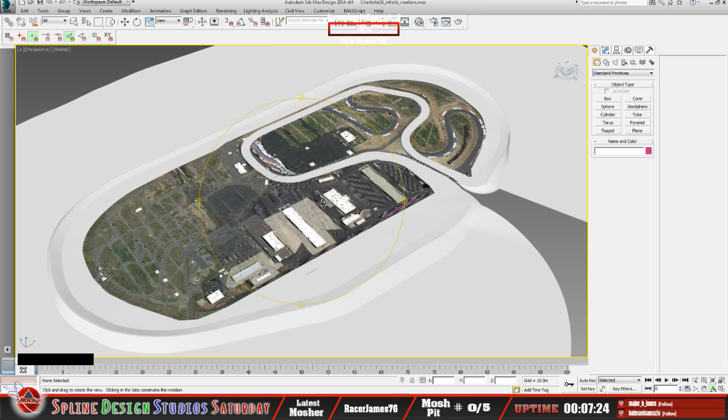So what we've got going on here is a current 3D orientation of the track model, I guess, in Sandbox for NR2003. And what we've done is make this infield object to fill in that voided infield object. I've already gone ahead, and I'll probably go over a lot of how I got to this point. I didn't save, unfortunately, a point here, I guess, as far as it kind of started off there and then just go.

There's a lot, I will say, as far as the way this is designed, there is a lot of Boolean cutting, as far as to get the shapes out that you need to have out, to get that shape. The general shape of this here can be done pretty much with a spline. All of it, the Boolean and all the Boolean cutter stuff can be done with a spline, pretty darn easy.

So I've also already got this model, as far as this infield object, it's already applied to the track, just to kind of see how it looks, and it's only mapped currently. Whether or not it'll stay that way is still yet to be determined. It's still mapped to the SAT image, as far as the detail, whatever detail does happen to exist in the SAT image. So here's where I added the infield.

Got the two separate PDFs as far as elevation adjustments, and now I do still have the background image in place, to which I could remove that. I'll just put this to none. Okay, so now that's all that's in. There's the infield object, and I can put this on object view, object placement view. So there's the infield object, and it lines up pretty darn good in comparison to what we have in Sandbox.

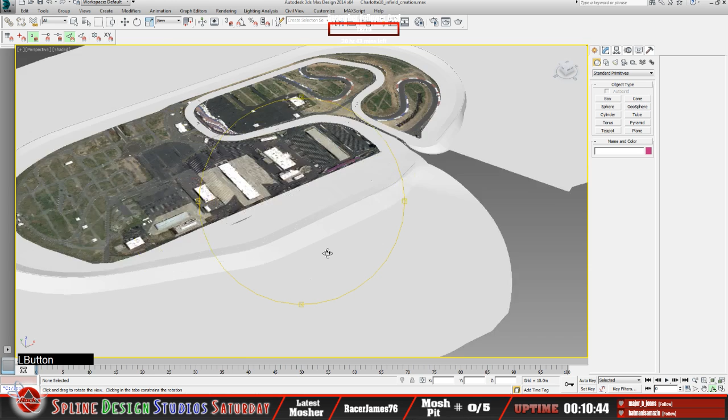So yeah, the biggest complication that has been up to this point is to get all of this to show. We didn't want to use the road course that's on the SAT image, as we needed this to show, and the fact that it's got elevation there now.

It's not 100% flat, like I said. That's what needed to be cut out so we could get that to bleed through, and you can see that clearly if I bring this here. Let's do this actually. Click out of that for a second so it shows up a little better.

Okay, so what we have, you can really see the elevations in here as far as this is the front stretch, just by the start finish line. This was going into what would be considered turn 1 for the road course. That's the other half there. We still need to make an object, I guess, to fill this void, but you can see the edge of the new infield object here.

I'll just kind of pan this over. You can see the track surfaces coming through very nicely. You can see the course very good, and you're able to... this is why I wanted to kind of do it this way. Let me see here. Yeah, I was like, what the heck's going on?

Okay, so yeah, I wanted to see how that would look on the SAT image. It's a little bit, it's not very good quality when I apply it this way, and that's what I want to at least determine.

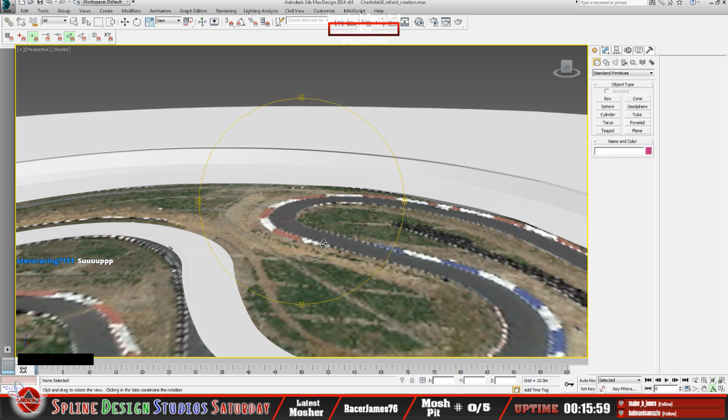Yeah, a little bit of a bug. I've been in and out of the restroom for the majority of the day, so I was kind of iffy as to whether or not I was going to be able to do this.

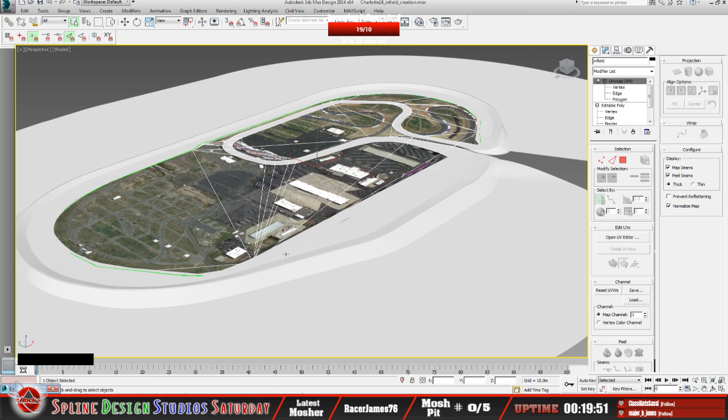Yeah, I've been in and out of the restroom a few times today, and I don't know where it came from. So I've taken myself some meds and kind of focused on something else besides just being under the weather, to be honest. I think it has to do with the weather - it's been up and down, like in the 40s, 50s, then down into freezing. It's ridiculous, it's murder on the body.

So yeah, but I definitely do appreciate that follow there, Classy. Very classy, sassy.

Okay, I'm still trying to... I'm debating here because all this is done. And I guess one of the things I wanted to do, that's the other thing I wanted to do - let's hide this for a second.

This is our infield object with the mapping, showing the wire for that. You can see it a little closer, as far as how that's all cut out to see all that definition as far as the surface that's actually raced on. And the main idea behind this - yeah, definitely, it's like I said, I had done it.

It was brutal, as far as when I woke up this morning with a headache, to the point where I don't want to go into the details of it, but you kind of get the idea. It's just that flu bug that's been going around.

I think, actually, going back to TwitchCon, because I know you had gone to TwitchCon, as far as the bug, what did they call that? You can probably refresh my memory on that. There's quite a few people that went to TwitchCon that got it.

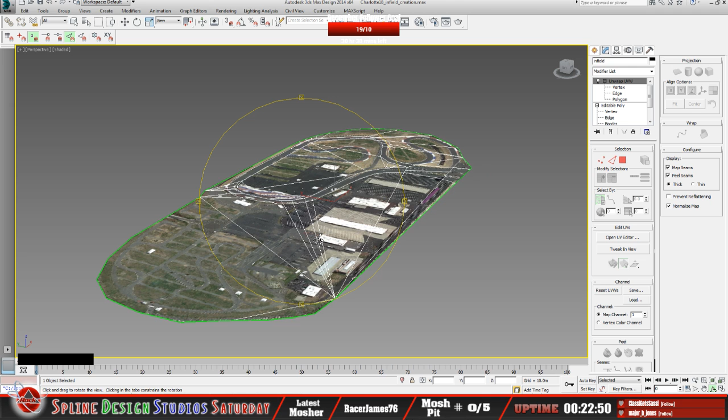I'm glad people enjoy doing those audio commands. I like to give the viewers something to interact with, I guess, especially when I'm doing spoopy stuff, as far as that tends to get me a little bit salty, just to kind of set myself straight again.

Without going into too much more detail, you kind of get the idea as far as what's going on with this. I think what I'm going to do, and I was going to try and fix the ends of it, but because I got the map modifier in there, I want to keep that in, to get to this point in a new construction of an infield, just to give you an idea of how I got to this point.

Like I said, it does involve quite a bit of Boolean cutting, and we've showcased that plenty of times before.

So I'll bring the track back, and I'm going to hide this section here. There we go. So now all we've got left is the track spline geometry, which is basically what you see here. This is a direct representation of that.

So what I can do at this point is go over this, and it might be really quick, so if there's anything that gets missed, like 'whoa, hang up a minute, how'd you do that,' feel free to let me know. I'm here to give some insight as far as what the process for doing these types of things is, so just chime in if I'm going too fast.

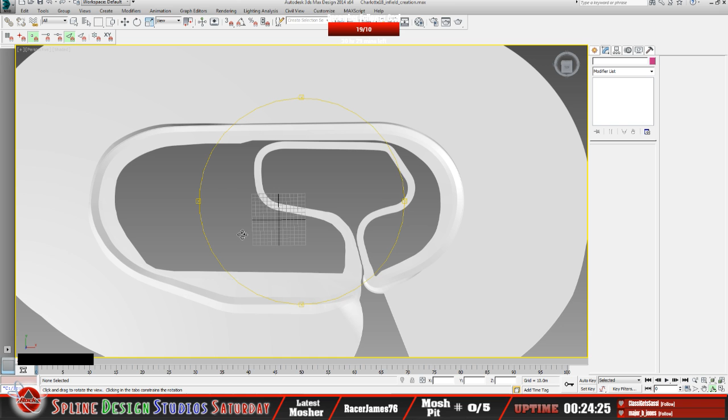But primarily what I'm going to do at this point is fill this void out, and the way I'm going to do that is go up in here... no, I'm going to go to the star.

And then I'm going to make sure I'm in compound objects. Actually, no, sorry about that, it's the second tab here for those that have it. I'm using 3ds Max 2014.

I have not been able to get the latest version of it yet. Eventually I'm hoping to do that. There's not a whole lot of difference in the versions of 3ds Max as far as how these workflows work.

So as long as you get into splines from the second tab here, and this second one for shapes, you want the option for line — this will allow you to create your spline. So you select this line, and you can start pretty much anywhere you want based on what you have here.

I could start up over here. I tend to like to start doing these types of things — this is where my front stretch is, where the start-finish line, the lead segment, if you will, is. So that's kind of why I tend to start over here. I mean, it's not pertinent that you start in a particular position, because you can adjust it anyway once it's all laid out.

What I don't want to include — I only want to focus mainly on this void here. I'm not going to do this; it's going to be an entirely separate object over here to fill this void eventually.

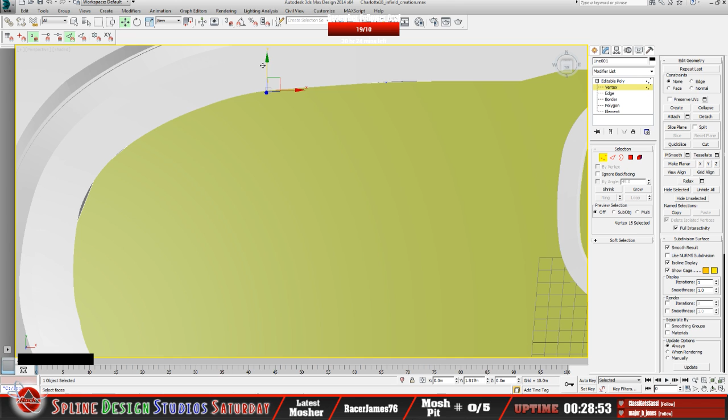So yeah, what I can do at this point is adjust all these, see these little gaps that I have in here. Whether or not I'll need to, and like I said, I've done this very quickly, just as long as this is tucked in here, I can select all these different points now and just kind of tuck this in here. Now, being the fact that this is still a top-down view, I'm not taking care of the gap that necessarily exists.

This way, so you can see the gap this way too. But try to put yourself in a discipline to do one thing at a time. Don't try to do both at the same time, because it'll get messed up. Trust me, I can tell you from experience.

So I'm just going around this just to make sure, from the top-down view at least anyway, that it's covered and it's slightly tucked under our track spline geometry model. I don't see any, like maybe over here. Yeah, so I'm just going to fine-tune these. Doesn't look like I need to add anything more, which is good.

Alright, just to kind of get that tucked in there a little bit. There we go.

Okay, now from this point what I can do is really zoom in on this. If I use the Z key with that vertex selected there, I can zoom out on this. You can zoom back out just a tad. Now what I can do on the Z here, I can either go down here and just move it up. I tend to just like to pick it up like this, and you can see it.

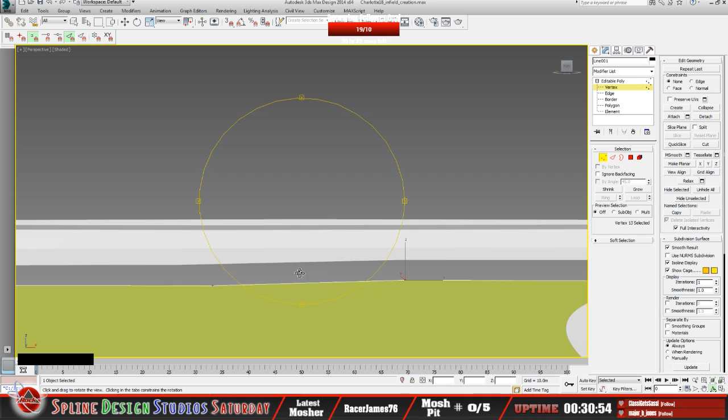Alright, so let's go ahead and do it this way. There we go.

Alright, now if I pan this around... yeah, that's a little better. Change the perspective there a little bit. See, now you can see it, how it's bleeding through as I pull this up on the Z, and you can see it changing down here too. You can see how far I've got it tucked under there and how it bleeds into the tracks, this model mesh. So that's more or less what I want to do.

Now you can necessarily take the approach of doing a snap, turn your vert and edge snaps on. What I've come to find in this method, because there's so many points in this model, it doesn't want to snap where you want it to go very well. So I've just found it more useful to just go ahead and grab those particular points like I just did and observe how it bleeds through the model mesh, and just do it that way.

You can attempt to do a snap by just turning your snaps on, and either using both the vert and edge snap, or just either or. I'll just demonstrate this really quick here. So it's like if I have the vertex and edge snaps on, you can kind of see it works out, I guess it does work out pretty good. You won't always get this effect though. Sometimes it'll get wonky on you.

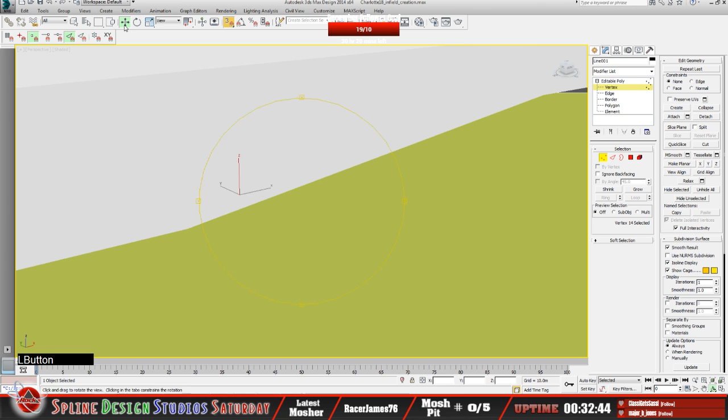But in this case, it does seem to be, yeah, see, it's not 100% snapped. See, if I turn this to the side here, it's still not 100% snapped. So the fact that I don't see it bleed through the actual mesh like that, see, this is a perfect example. It doesn't put it exactly where you want it.

A lot of times I can turn off, let's say, vert snap, the vertices, and just leave the edges on. See, you can see how it gets really wonky. You don't want it showing through the mesh. You want it just to kiss it, if you will. So, again, that's kind of why I've found it necessary to just do it this way until it bleeds through and just kind of tuck it down.

Like so. And then if I pan it over there, now you can see that's filled in. See them where it's not yet. Okay, so you just have to do that all the way around. Do that all the way around here. Okay, just gotta find a point here. There we go. Okay, so then just zoom in on that with the Z and zoom back out just a tad.

There's a lot of panning around with it, that's for sure. That's doing it again, okay, hold on, I gotta change my perspective. Let's bring that back down. See, when you don't see it coming through there, like I just did, that means your orientation as far as your little transform gizmo, you're not truly grabbing the Z-axis. You're grabbing more than that. So that's when you don't see it bleed through there, that's when you need to readjust.

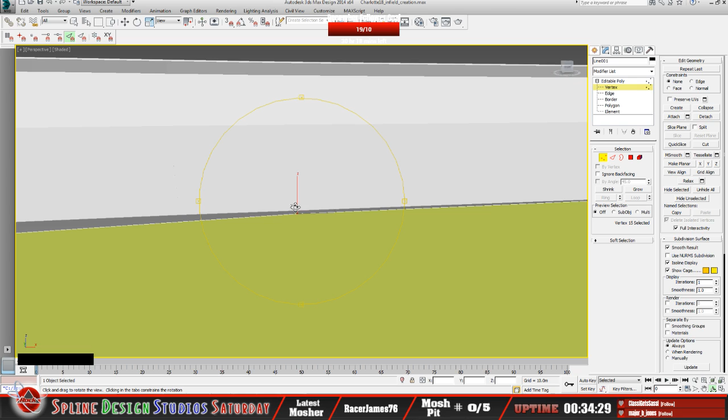So I can just move this like so until I got the better view. And because there's so much elevation change in this thing, yeah, see now you can see it bleeding through. Just kind of tuck it under just a little bit, and there we go. Okay, so we should have another point. Looking for the blue points. There we go, here's the next one. So once you get into a flow here, it makes it a little bit easier.

I know, trying to explain it all, it's just like, it's a lot to try and get under there. See, so there might be some cuts that I might have to make to kind of fill in these points where it's not getting 100% up to that. There's a little bit of a gap there, not too terrible.

And at any time, as far as doing this process, you can always render it. Going up to the renders, I'll do a render setup, and let's put it at 800 by 600, and just render it, just to kind of get an idea of how it's turning out that way. So far it looks pretty good. It's not artifacting or anything like that. We're good so far.

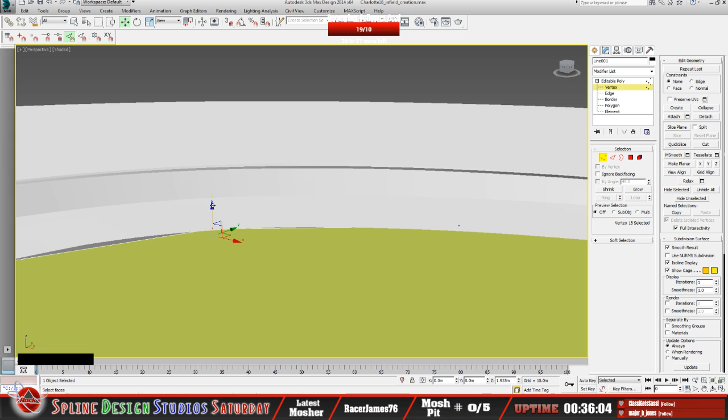I might have to put a cut in here eventually because it's not tucked under a bit. Again, get into the discipline of only doing one thing at a time. Don't try to adjust it in so many different directions at once. Just try to do one thing at a time. I've come to find that type of workflow gives you better results.

I'm definitely going to have to put a cut in here, for sure, because that's not 100%. Now, I could bring this all the way in like that if I really wanted to, but I don't really like how far that's going in. That's just personal preference. I'm going to keep it about the same distance from the edge as far as tucked under. This is not wrong, don't get me wrong, but I don't know if I like that. We'll go ahead and do that just for the sake of this, though. I laid this out pretty quickly, so yeah, see that's bleeding through, so that's good.

Okay, so I should have a point here. All I'm doing is drag selecting, because I know I've got points roughly in those areas. Since they're underneath this track mesh model, you can't see them until you just drag select it. This one needs to go down just a tad more. And you can always reassure yourself by rendering it to make sure it's not bleeding through.

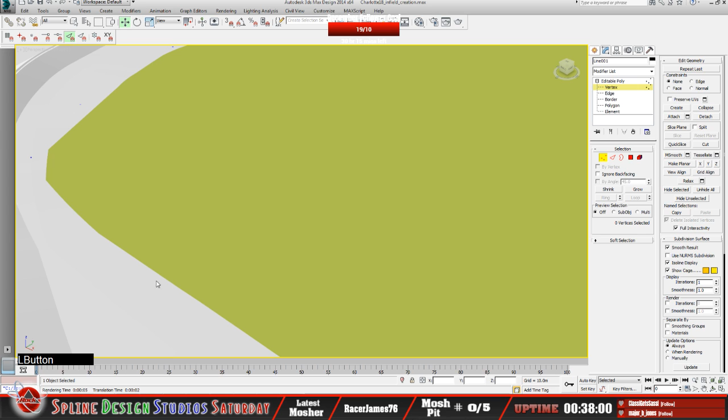Yep, that looks pretty good so far. Okay, so we should have a point here. We got one there, there's the other one. So bring this up, yep, that looks pretty good there. Alright, should have a point in here somewhere. There we go. Bring that up.

Yep, so you see how it just bleeds through. Tuck it down just a tad. Alright, now there should be... oh, this is the one I went all the way across. Down here, I don't have anything in between here. This is pretty straight in this part, and this would be what would be considered pit road, as far as our virtual world.

Okay, so... whoa, damn mouse. I keep adjusting the DPI on this thing. It's a very good mouse if you use it correctly.

Okay, so see what it's doing so far, and you can see that change in elevation over here as I move just this vertice. It's wanting to pull a lot of this up already. That's primarily why you need to cut this all out, so that you can adjust this area independently from the rest of it. Because otherwise, you're going to have a lot of this track surface that gets raced on, and it's going to be below that infield object.

Okay, so what we're going to do is just make sure it's lightly tucked under there, like so, like that. And I don't have anything in here in this area yet. The only places I have any points is on the extreme edge of this. Eventually, once I Boolean cut it, it's going to have points in here where I can adjust them more precisely there. We're going to get to that.

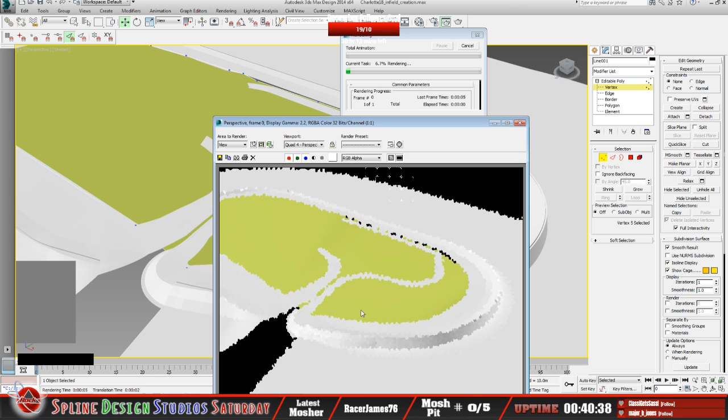Alright, so there's one here. Again, I'm going to go ahead and render this just to ensure it's not bleeding through in the fashion that I don't want. Okay, let me zoom in on that just a little bit more. And I'll render it again.

And doing this rendering thing is going to give you a more precise idea of what it's going to look like. If you see any artifacting of this edge that I'm trying to put here, as far as this pukey looking green coming through the white or the gray in the render scene, then you know you need to adjust it in the perspective view, in the viewport.

Okay, so moving along, that's good there. Yep, see all this, we'll be able to adjust that manually. I'm going to have to bring this in a little bit, because I could still have a gap this way. Okay, yep, still a little more. I might have to cut that a little bit more when I do my Boolean cut.

I should be able to apply an additional vertex in there. Alright, so bring this up.

Okay, this is a pretty simple model, I'm sure you can probably imagine. The only complexity in it is just the fact that you have to have all these cuts to be able to adjust them at particular points. But for the most part, this is a very, very simple model.

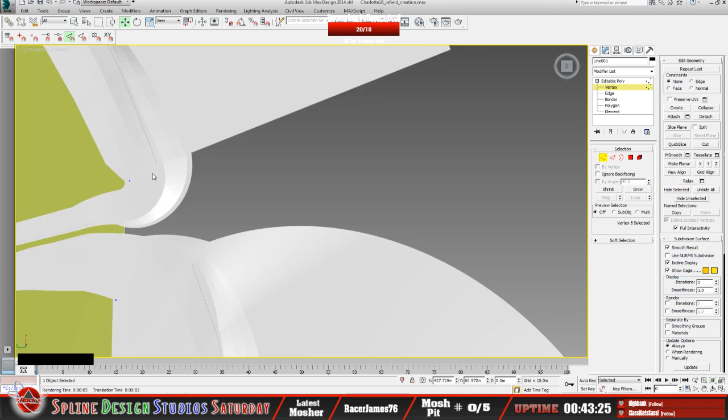Hurt my brain with that, well, don't allow me to hurt it too much, okay? And I've always mentioned this, my philosophy has always been, not to be too harsh, but the only dumb questions are the ones not asked.

If there's something you don't quite get as far as what I'm trying to apply here and what I'm trying to show, feel free to ask. I am in no means one to point people out to be like, really, you didn't know that? This is why I do these streams, because there's a lot of people who have somewhat of an idea what goes into these types of things, but they don't know everything. I've got a little bit of experience with that, and that's why I like to do these streams. So that people get a better appreciation for the amount of time that goes into creating such things as this.

So, but if you do get proactive with trying to create something on your own based on the information I can provide, then more power to you.

Alright, so now we got that all adjusted. To this point, this is where it gets a little tricky.

What we need to do now at this point so that we can cut out this area here that is raced on, all this area in here, and it's hard to see because it's covered, a lot of it. We need to be able to cut it out in our poly here that we have. Let me see how many polys this actually is. I can select polys here, select all those, and right now we have, that's only one poly.

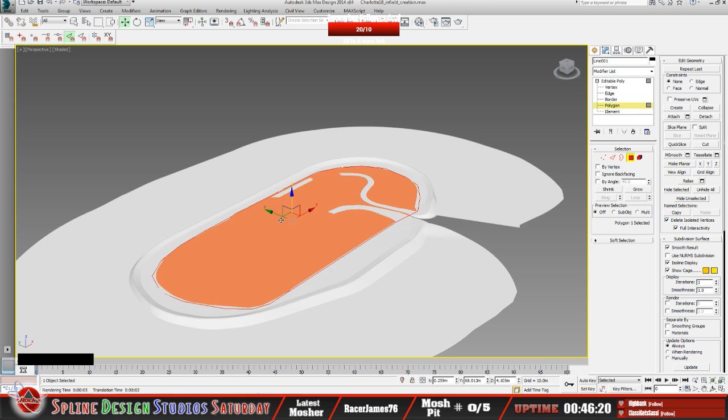All these points in here, it's kind of hard to see in the stream, but you can just tell how much detail is in here. If we could use this as an actual model, just the way it is, that'd be glorious.

But the fact that that's impossible - there is no, even with the newer simulations out there, as far as different game types, as far as the graphics engines, it can't do it. It's impossible. So again, part of the reason why I tend to stream these types of things is to kind of understand what goes into the thought process of building these types of things.

So yeah, now where we're at - I'm trying not to get sidetracked here a little bit. We need to cut out that area, and the way we do that is I'm going to hide this one poly we have for the object so far, like so, and go to a complete top-down view. Let me turn this so we're sure we're top-down, complete, there we go.

Now what we can do is create a new spline as a cutter to cut into that one poly object we just completed, to get this area cut out.

The way I went about it initially, I'm probably going to try something here - I want to see if I can get away with doing one big piece for the outside and inside at the same time. I'm going to see if that'll work. It may or may not, because when you lay your spline out to do a cross section, you have to do those independently. Let me take this really, really slow.

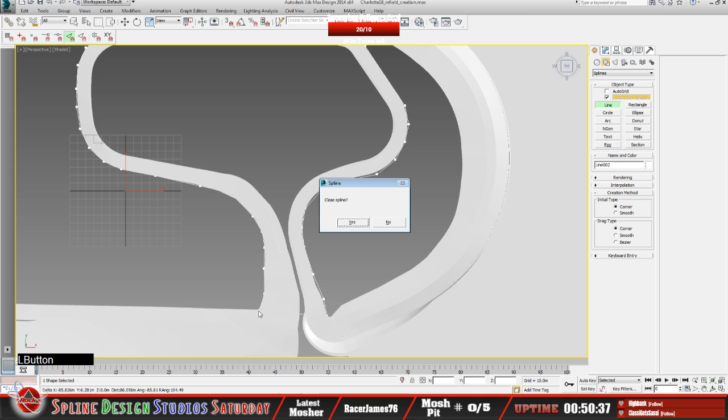Alright, and then what I'm going to do - I'm trying to remember how I did that now. I think I'm going to cross this way. Yeah, pretty sure that's how I did it.

Now I gotta remember, because this is why I was talking about being able to do them both at the same time, just running it through here. You could probably do that, actually, now that I think of it - you should be able to take this through here and then close it up that way. Let me try it that way, actually.

I'm going to go ahead and delete this one. Okay, I still got line selected there, so I'm going to go this way and lay this back out. Alright, I'm just going to follow through with this again.

It can tend to get really tedious, you do have to have a steady hand for sure. I kind of lied a little bit too, as far as not being able to move around in there - if you have a mouse with a middle button, it does let you. The key to having it all in one view is so you don't have to do that, because you can screw it up pretty easily mousing it out with your middle mouse button. And if you're this far into it and have to start over, that can get frustrating. So once I get down here, I'm going to cut across here.

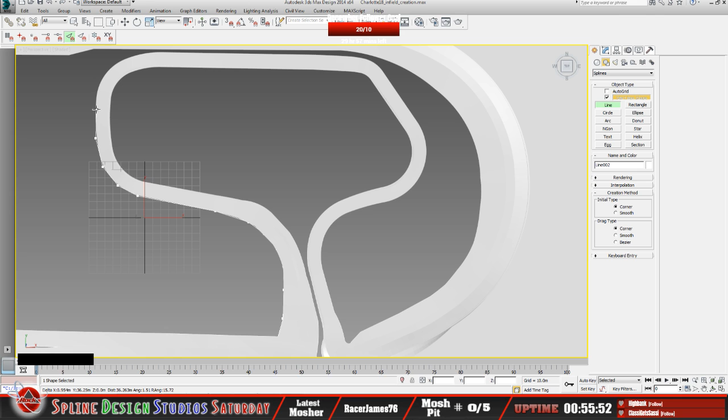There's other ways to do this as well, as far as using planes. Like, say for example, if you want to create a plane, to be honest, to get more precise on these corners and such, you almost want to use a spline like I'm doing, because trying to conform a plane is a bit tougher. It's going to be much tougher. So, alright.

Yeah, I can adjust a lot of that there. So what I'm going to do, I think, I might not even have to do a cross section actually. No, I shouldn't even have to. I can do it just like this.

Alright, now from here I need to do spline, and I want to clone this. Yeah, so there should be a point right here is where I started. Okay, should be.

Alright, now I want to clone this, do it as a copy. And I've gone over this before too, the difference between an instance and a copy. If you do it as an instance, your clone options - any changes you make in one line, in this case, happens to the other one as well. If you do it as a copy, they're independent of each other, as far as any adjustments you make in one, and it does not affect the other. So, and we've mentioned that before, but that's a nice little refresher footnote there.

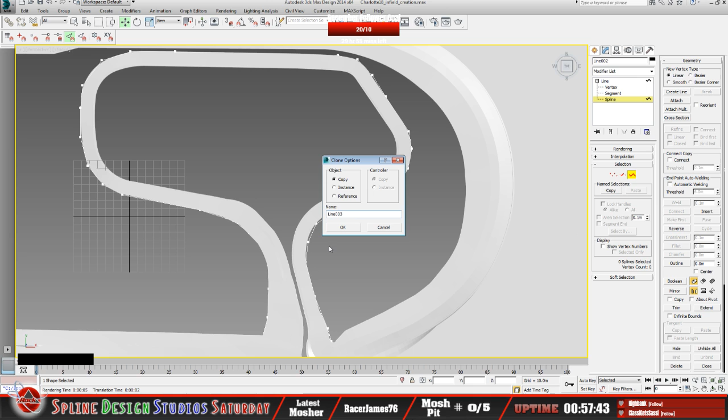Okay, so we want to clone that as line 3 in this case. The naming conventions of that aren't critical. Now what I can do with that cloned line, it's going to be right on top of the other one, so I can take that and just move it up. So now you can see that's floating, and it doesn't matter how high it is.

I want it to be extended past the actual model here. Let me see here. What I might have to do initially, just so I can fine-tune and tweak, because I want to make sure... and I can probably do that after, to be honest. I guess once I get it cross-sectioned, I'll just do it that way. So now that I got these two lines, I don't want to confuse anybody. That's my whole problem, because there's plenty of different ways I could go about this from this point, but I'll keep it as simple as possible, just so viewers understand.

Okay, so with that line here, that's a direct copy that I have for the two lines, so it has the same number of vertices in them. That's a critical point. Now what I need to do is go into spline on either one of these, doesn't matter if it's this one or the other one, and choose spline, and then I need to do an attach. And what this should do, if I did it right...

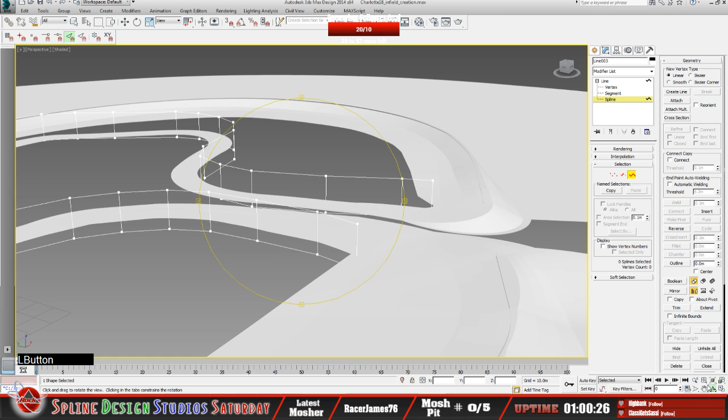Okay, so let me close the track mesh. I want to see how this looks over on this end. From this vantage point, it looks pretty good, but yeah, I want to double check this. So yeah, that's actually favorable.

Alright, so the two things, if it wasn't clear: you first want to attach so that both lines are highlighted and they're loosely welded together, tacked together if you will, and then do the cross section. This gives you this orientation here, so that's basically 2 steps to get it to this point.

From here, what I can do, now that I got that done, I can just right click on this and convert it to an editable poly. And what the heck happened there? Oh, that's not cool. What happened there? Oh, I know what I missed. I got ahead of myself.

You have to put the surface modifier. Okay, so while it's still in this one here, you want to put a surface modifier. See, I was kind of getting ahead of myself there. So in the rollout here, with this selected like that, you just put a surface modifier into it. So just scroll down here, you can type it in... there we go. So that puts a surface modifier on it.

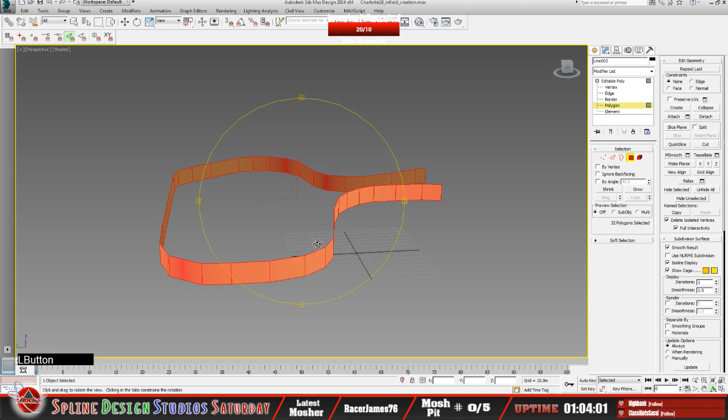Now what I can do is bring back our infield object. Actually, no, I want to bring back the track mesh. That's what I want. Then I can fine-tune the areas on this cutter that will be used to define that area better. From this point, I can clone this cutter to make the internal one. I can adjust those.

In fact, I'm going to go ahead and do that. We'll do an edit clone of this object as a copy. Then from here, I'll just slide it out of the way like this. Then I can adjust those independently on the inside.

So if I go into vertex here, I can grab any of these points and just kind of move those in and get it to line up to the interior. We'll just kind of loosely put these into place like so. Let me go down, let me see if I can do it this way. Top down view. What the heck is going on there? Kind of wonked it out there.

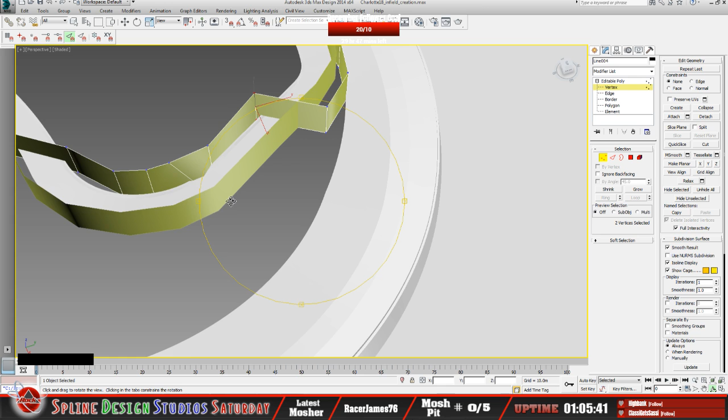Yep, I kind of wonked it out there just a little bit. I don't know how that happened, but okay. See, it was straight up and down. Let me adjust that, pull it out this way. That's a little better. Yep, must have been the way I grabbed it. It's not wrong, it's what happens. Just realizing what you did when you know what's happening to it.

Alright, so bring these in. Let's bring this in. Yep, so I'm just kind of loosely putting these in place here, kind of outlining the interior part of this. Yep, so I'm kind of grabbing both those vertices on the top and bottom, pulling them simultaneously.

And like I said, all this is going to serve as a cutter for our infield. See, we're going to have to add some in there because this is too straight. We'll probably move this. There we go. Kind of get the contour of that corner there a little better.

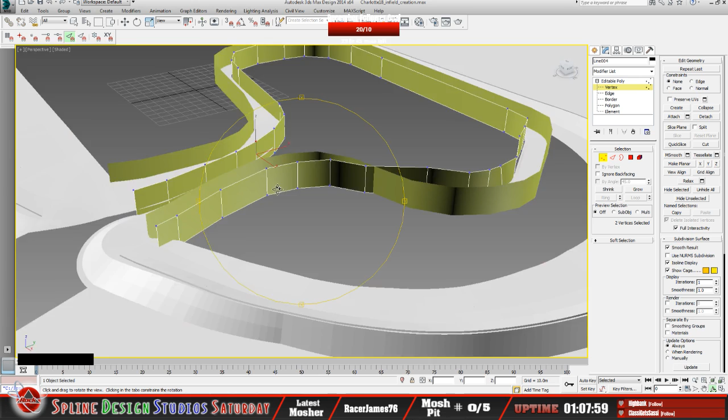Okay, so now we got that. Now we need to put... whoops, guess I missed this. Just gonna get this all loosely into place here. Alright, so now... is that... yeah, okay. So I gotta move all this here. Okay, let's go back to top down. Nope, just gonna move this all in place.

So you can kind of get the idea as far as what I'm talking about, as far as how much you'd have to do to get this infield object cut, so you can get all this detail defined into it.

See, I did it again there, that part. Only selecting the one, yep. This, seriously? Holy crap. There we go, I'm gonna get those both here. Come on. No. I'm being a poopy. Okay, there we go. I could have just zoomed in on it, to be honest. Okay, there we go.

Okay, so I'm just getting these loosely lined up here for now. Probably have to adjust them again before I cut, but just to kind of get them somewhat into place. Okay, let's get 100% top down.

Hate when that happens. How we doing there, Torch? Glad to have you in the stream. Hope your day's work is pretty good for you there. Ooh baby, it's good to hear.

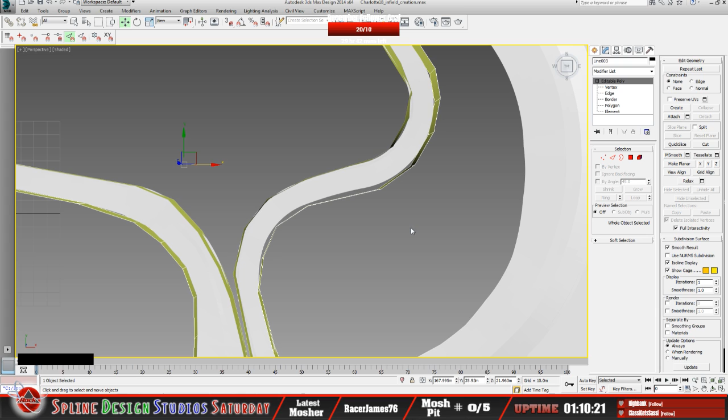Okay, yeah, so what we'll do now is go into vertex and this one, kind of adjust this out.

Kind of good to see we got plenty of members from the NR2003 community, I guess, coming in on the streams there. It's good to see, I like to see that.

Okay, so the fact that I'm on a completely top-down view here is giving me a much better... and I'm probably not going to use this as... should be a point right there. Oh, I'm not on that one. That's right, that's right, okay.

I'm just trying to give you an idea of what the process, I guess, for doing this is. This may not be 100% favorable for what I would use, because I've already got the infield object made. So I just want to go through, I guess, somewhat the process that I went through to get to that point.

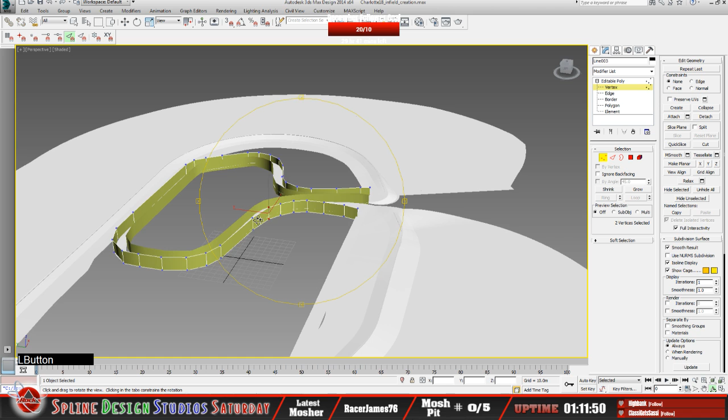Alright, so now we have our two cutters, which will more or less serve as one cutter, really, once it's all said and done here. It's not 100% clean. What you could do from here, if you needed to, let me see.

Say like in this line here, it's not... well, there are some vertices. Okay, let's check this out here for a second. Yeah, I should be able to move these to kind of more precisely define this corner, as well as in here.

Alright, so if I go vertex, vertex, yep, just going to fine tune this a little more. I've got this pretty jagged, to be honest, but you don't want that as far as when you're cutting it, that's for sure. You want it to be as precise as possible.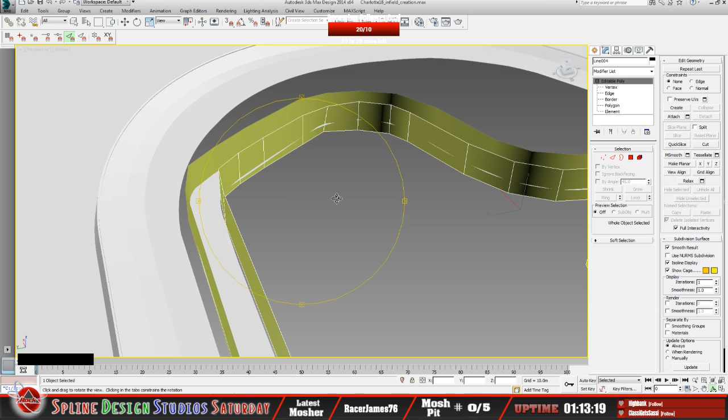Not sure what's going on with that there. I don't know if it's not 100% top down, maybe. Alright, just for the sake of this demonstration, anyway, let's say this is satisfactory. This will work, as far as using it as a cutter.

From this point, what I'd want to do, I'm just going to go into a side-on view like this. Go to vertex, and I want to grab only the bottom vertices. Actually, I don't even need to do that. Yeah, I don't even need to do that, I can just lower that.

Yeah, let me just lower it. And by doing so, that's going to put it below where the infield plane is, what it's going to cut into. You want to have a little bit of excess, so that it makes the cut completely through.

Alright, so just by lowering that, what I can do is I can actually look at the Z for that. I've got it at here, and I can just copy that to the other one so that's at the same level. Okay, go into this one, paste that in there. Now those are both at the same level.

Now check this out. You can see, even by doing that, just how much elevation change there is, because these two booger-green looking... whoops, what the heck? Oh, got stuck in this.

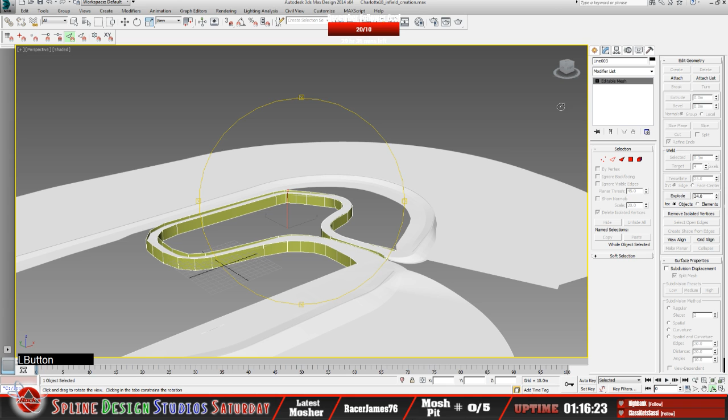So I'm going to my hammer, going over here, and going to collapse like so, and just collapse selected. So now that's one object. You want that to be one object. As far as the cutter, we don't want them independent, it won't give you the best result as far as doing that. So we want it as one object. Now what I'm going to do is bring the infield object back.

That's what I was like, what the heck? Yeah, this is the one I already got done. It's like I almost forgot there.

Okay, so this is the new one that I made here. Now I'll hide this track mesh, so now all we have is just these two items: the item we want to cut and our cutter that we're going to use to cut it with.

You can see why you drop that down - you want that to protrude through so that it makes a cut through this model here, as far as the one poly for the infield object. We want that to be able to cut through that, so that's why you do it in this fashion.

Okay, so now from this point we want to go to Pro Boolean, or actually just Boolean is fine. Go into the starburst here, same place you'd go to lay your spline, and then from here go to Compound Objects, which is in this first tab. It may or may not be selected initially, so go to Compound Objects and you'll have a Boolean option.

You want to have selected the piece that you want to cut prior to doing this. So with the item you want to cut selected, you do Boolean, go down into here, and do cut refine like such. Once that's all selected, you go pick operand B, and operand B is your actual cutter. So if I go like this, hopefully that works.

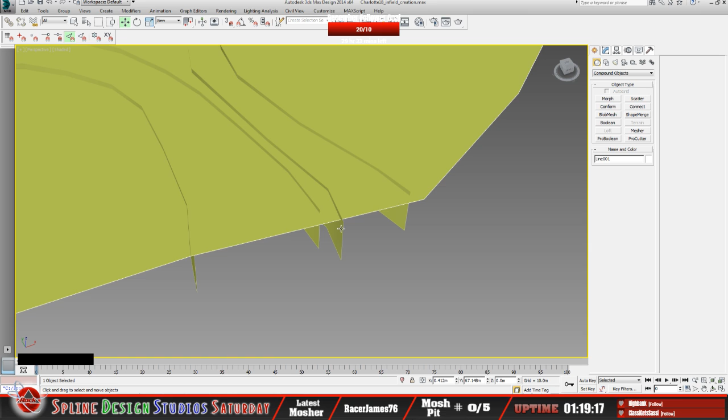So all I need to do is - and that's pretty simple actually - I can select this part here, and that's all one object. It shouldn't need to be an editable poly, but I'll go ahead and do that anyway. So let's do that, editable poly, and then go to polygon. Actually, I can go to edge.

Okay, and then just do a shift, left shift drag. That'll create a new poly. And all I'm trying to do is just connect this here so that it doesn't have a gap there.

Alright, so with that done, now I'll just snap. Let's put my vertex snaps on here, put that on up here, I'll turn the edge snaps off. Snap that to here, as well as snap this to here, so that closes that in.

I think that's what the problem was there, as far as why it wasn't cutting all the way through - it had that gap in there. So now with that completely closed in, it should work properly. Should is the operative word.

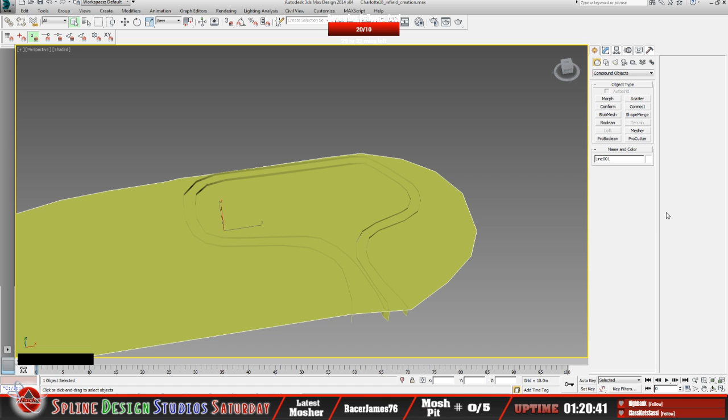Once again, we'll go back. Let's turn the snaps off here, select the model you want to cut, like so, and then go into your starburst. That's actually pretty funny, I kind of wish I had some starbursts right now. Anyway, do your starburst, compound objects.

So have your Boolean, and it'll initially apply some cutting there, which is not terrible. Go down to cut refine, those two radio buttons - you want the radio button for cut as well as refine. With that done, you pick your operand B, and that's going to be your actual cutter. Nope, it's still doing that. Son of a gun, okay, so we got something else we got to fix.

It's kind of good that these types of things are occurring, because you might necessarily deal with this yourself and be like, what the heck's going on. But the fact that I can go back - so let's see what we did wrong here. Shouldn't have to, but I might have to connect this all completely down here.

It very well might be because I don't have this extended past this edge. So the fact that it's not all the way out to this edge, we're going to try that now. Just like having the cutter going far into the model when cutting this way, that's why you want the cutter, as far as what you're using to cut, to surpass the edge to make sure it cuts through it cleanly.

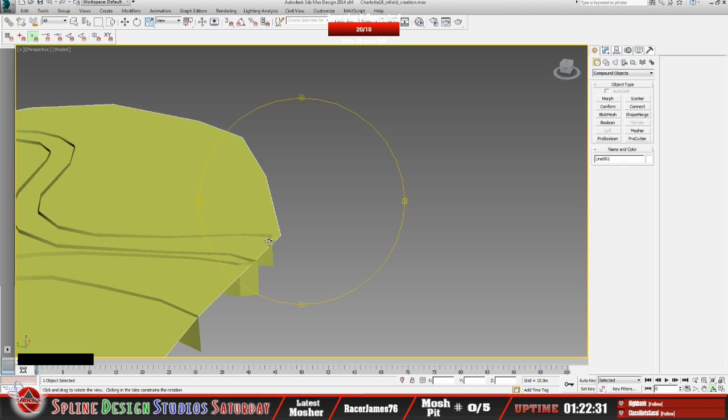No, they actually probably don't, and that's what I'm going to show here in a second. It probably wouldn't hurt to be connected, but the main thing is this doesn't go all the way past the edge. See how this one does? It's not cutting all the way through on this side. That's what's happening because it's not.

So what I'm going to do right now, I need to go into the actual cutter. So right here, if I go to vertex like that, I'm going to stretch this out so that it goes past that edge, and I'll do the same thing with this here just to make sure. You can over exaggerate it because you want to make sure it cuts all the way through that. So just make sure that's all the way past that edge. See?

That's not to say that you couldn't completely connect that. What I wanted it to do though is maintain this as separate polys in here. So if I go across this, it may necessarily chunk more out than I want to. So that's another reason why I do it this way.

All right, so you want to make sure your edges are, just like your z-axis would be, far enough down into the object you're cutting, just like this is. You want these edges to go past the edge that you're trying to cut through. So I think that's probably it, so we're going to go ahead and try this.

With the piece that we want to cut selected, go back into Starburst, Boolean, and it'll do an initial cut. We want to do cut, refine. Pick your operand B, which is your actual cutter, and there we go.

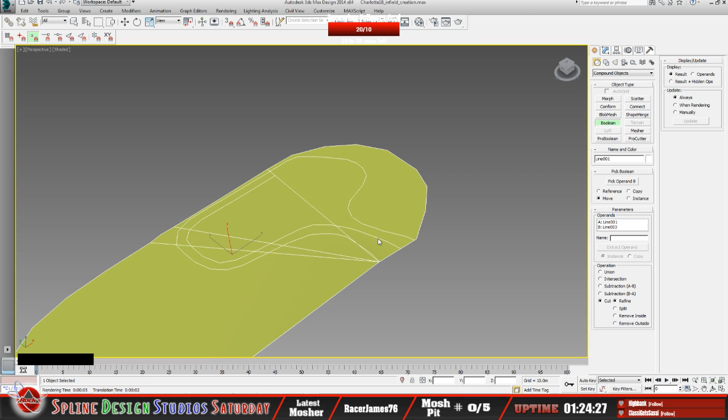Okay, it's still kind of goofed up a little bit because I didn't cut this here, so I might have to close that in. But you get the idea. As far as what you're trying to do is get this so that it cuts completely through. See, it's getting this outside edge, but it's not getting it in here. So we still got some refinements to do to our cutter, which can be adjusted.

Just for the sake of it, I'm going to go ahead and fill, connect. I really should not have to do that. So the fact that it's actually giving me that result, that's kind of funky. But okay, we will deal with it. It's all good.

Yeah, so it's not getting the interior here. Okay, just looking to see. This might even actually be too low here. I'm not sure. Should be fine, I mean, it's extended past it well enough, I think. Okay.

I think what I'll try and do here, let's do this. If I go into the cutter, what we're using as a cutter, I'm going to adjust these vertices here, just bring these up. Like I said, you can over exaggerate these, you're only using it as a cutter. I just want to make sure they're up high enough. They don't even necessarily have to be all the same height. So the fact that I'm doing this kind of all helter-skelter.

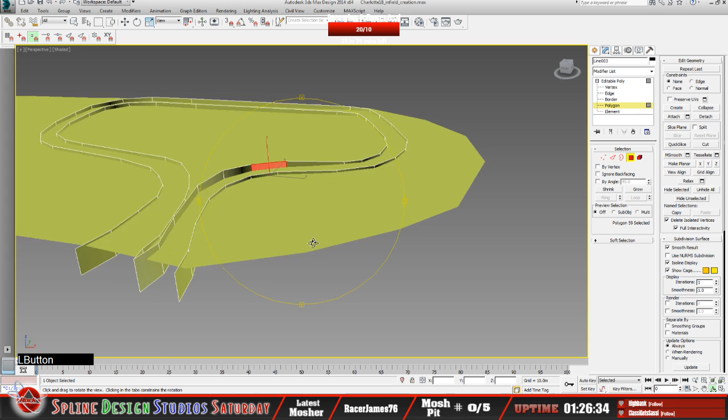Alright, so let's try this again. So with the infield object, the piece that we want to cut selected. Okay. Now we want to go to our Starburst, Boolean, cut, refine, pick operand B.

Yep, see, it's still missing it here. I don't know why, though. Yep, we want it to cut all the way through that. Okay, let's see how this is. Get it all the way back there. So, I'm going to have to connect this somewhere, at least anyway, to get that to...

It's not going to do me any good to put it on the very end. I know that for sure, because it's beyond. But I'm going to try that anyway. So let's go to, on our cutter, like this. Let's go to edge.

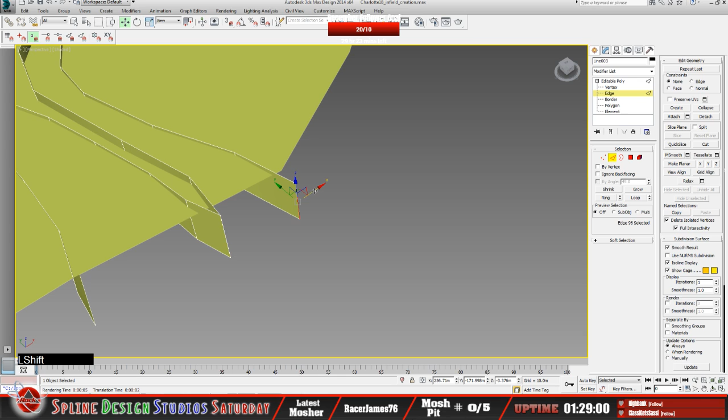Hold on, come on, cooperate with me. So, edge. Hello? Okay, let's try it this way then. Hope I'm not using up my memory already. There we go. Okay, so yeah, we just want to get a poly going on there.

Shift drag that. We're going to grab these verts, turn on our vert snaps, snap this to here. We'll see if this works. So now I got that completely closed in there. Let's see how that works.

And if it doesn't work this way, I'll put another poly like in between here somewhere to get that connected. Alright, so go back to it again. So select the object you want to cut. Starburst. Boolean. Cut, refine. Pick operand B.

Nope, still doing it. Okay. It's got a pretty good cut through it, other than right there. That's kind of crazy. Alright, it's being stubborn.

Okay, so what I'll try to do then, let's turn off the snaps here for a second. We're going to force this thing. There's no reason why that shouldn't work. But again, like I said, the fact that these types of issues are coming up, you might not necessarily run into these yourself. But it's kind of working through it as far as the different options you would have. I don't think that's too low, because it's not even cutting through here. So, alright, let's do edge.

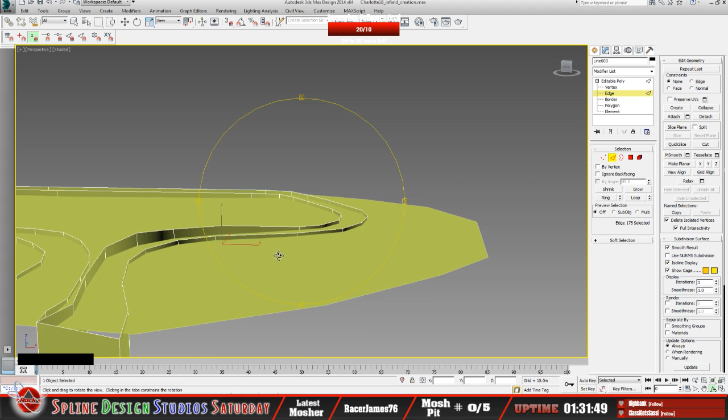All I'm trying to do is create another poly to go through this to connect those, but it's not wanting to work the way I want. I might have to detach first. Yeah, let's do that. So let's go to poly and just select any one of these. So we'll do detach, as an object.

Now, what I should be able to do, let's see. Select that edge. Top down view. Yeah, there we go. So I had to detach it in order to get that to work okay. So now I'll just have to collapse it again, not a big deal.

Now I need to go in vertexes here. Let's do these one at a time. Turn on my vert snaps. Snap that there. Okay, where's the... there we go. Let me get that one there. Vert snap there. There we go. So that's snapped, so that's more connected there.

So let's see how that works. Okay, try it again. So now we got that somewhat connected there. That should hopefully... we're going to find out here in a second.

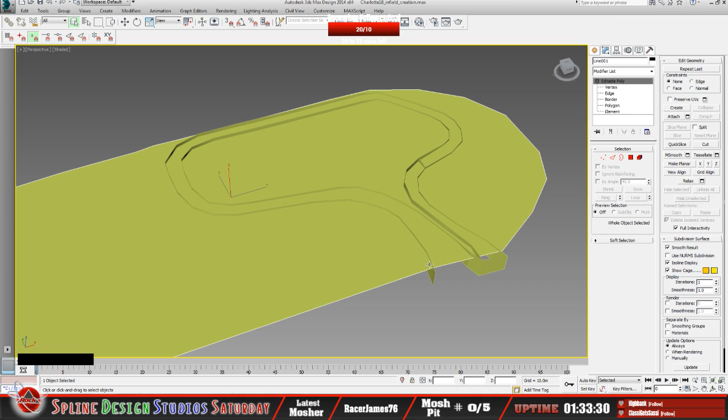So let's select the object we want to cut. Turn off the snaps. And starburst. Boolean. Cut, refine.

And pick operand B. Yep, that's exactly what I thought it would do. It's stopping right at... oh, I didn't connect that back, I didn't collapse it. So I think the fact that... but it is cutting it through there. It did cut up to that point. So I might have to connect this a little more.

Okay, yeah, I forgot to collapse that all together because it kind of stopped there. Alright, so let's do... let's collapse these first and see what that does. Go to my hammer, collapse, collapse selected. There we go. Oh, I should just have that by itself.

Alright, let's try that again really quick here just to see. Starburst. Boolean. Cut, refine. Pick operand B. Yep, see it's stopping right at that point.

So what I can do is just put probably a couple more intersections here, cross sections here to get that. That's not a big deal, to give us the result we need. Alright, so let's back that up. Okay, so what we need to do...

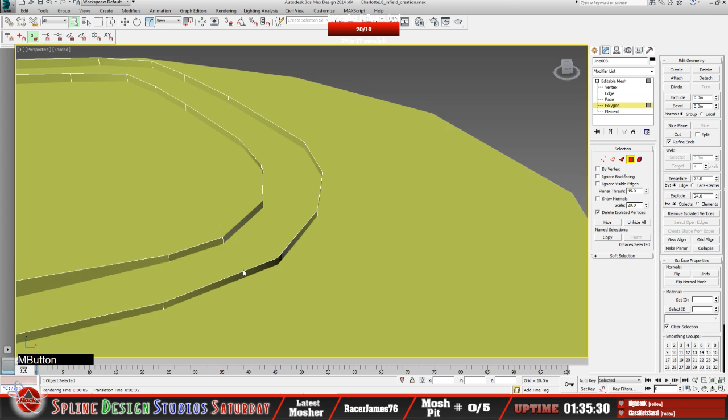Let's go to polygon in this. Hopefully this is making sense to people as far as what I'm trying to show. So select that polygon, I'm going to detach that as an object.

And that's only to get at the edge that I need to create a new poly from. So I select the edge. Got the wrong edge selected, I think. Let's go into this one, go into edge, shift drag that out. Yep, creates a new poly.

Well, good thing it's making sense. As long as it is making sense, that's the critical thing. I don't want to confuse anybody, but it's just to give you an idea of somewhat the process of what's involved with doing these types of things. So as long as it's making sense, that's the important thing.

So what I need to do here is go to vertex, turn on my vertex snap, and snap that to here. And this one on the bottom here, and snap that to there. Okay, turn that off. I just have to make sure to, and I'll probably just go ahead and put another one in here too. Let's put one up the ways here.

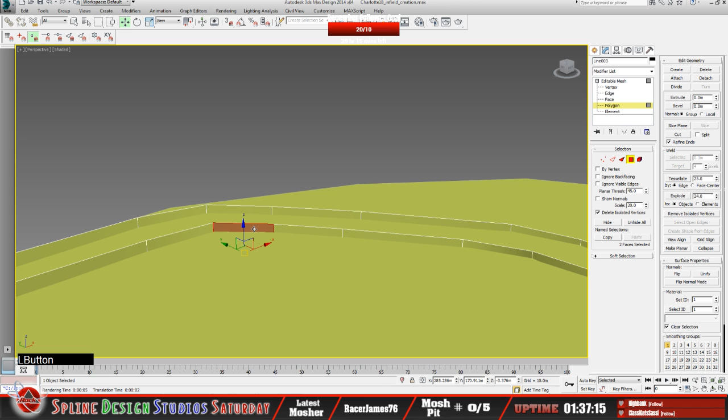Let's put one like right up in here. So we'll go to poly, detach that as an object. Select that one. Hello, that's the one I want.

That's about what I'm not sure. Technically, the only thing I can think of when I did the infield object that I have done, I did them independently - meaning I did the outside and then the inside part. I didn't try to do it all at once. So that's the main difference. So the fact that it's not cutting all the way through in that region, I'm not 100% sure, but if anything there's a way around that, a workaround for trying to force it to do that.

And that's by adding these cross pieces here to cut through that physically, then that's your answer. Because I do know I'm not out of whack as far as having an adjacent set of vertices across from the other side, so it's not offset in that fashion. So the fact that it's missing all this as far as cutting it, I'm not 100% sure. But again, what I'm trying to show is the way to get around that if you're experiencing that type of thing, because it's obviously completely possible to cut this area out.

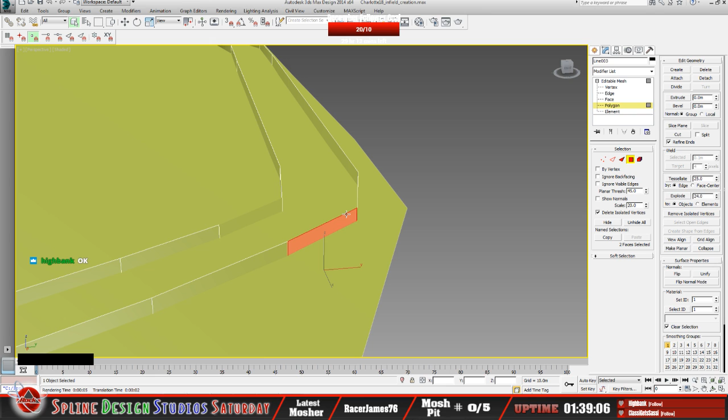But just to explain a little bit further, and once again just to summarize, when I did these cuts initially in the object I already have done, I did them independently. I did not try to do it in this fashion. But what I was trying to do is kill two birds with one stone and get it all cut out in one fell swoop. And it's possible.

It's just a matter - what it's forcing me to have to do is create these cross sections here. So if we go into edge, go here.

And then do a shift drag. Nope, keep doing that. So I'm in edge. Come on now. What is that? Shift - there we go. Sometimes you gotta zoom in a little bit.

Alright, now I need the vertices for that. Okay, hold on here, I gotta see where the vertices are from this part. Over here, okay. Alright, so we're going to turn our vert snaps on, go to this, grab this vertex, snap that over here, and also get the bottom.

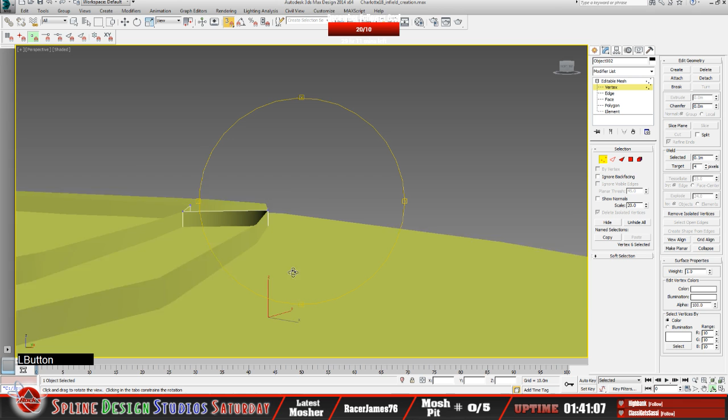Come on, there we go. Alright, so the bottom - what the heck? Oh, there we go. So this bottom here, snap that to there. There, that should be snapped in those verts there.

Yeah, so just adding. Now we need to, once again, collapse that all together. Go to my hammer, I'm going to turn off the snaps. Collapse selected - that's all in one piece again.

Okay, now going back through it. So the piece you want to cut, go into Starburst, Boolean, cut, refine, pick operand B. Whoop, it's missing here now. Good grief, we're getting there. We're definitely getting there. The fact that it's wanting to leave all that out of there, that's kind of crazy. So we need to put something in this area so that it cuts all the way through on both sides. We're getting there.

Okay, so we need to probably put at least one more set cross section in there. We'll get it here. There's more than one way to skin a cat. Alright, so let's select this, and let's go ahead and put one like here, across this here - that should work. So what I need to do is go to polygon.

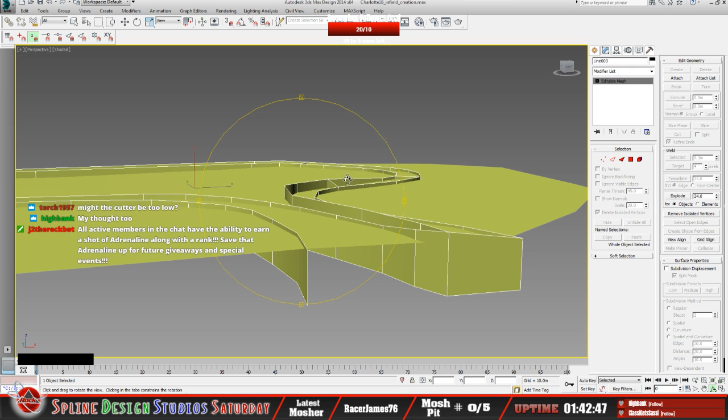It's possible, very possible. That's what I was thinking of, that's why I raised that other area. But the fact that when I raised this area, it didn't really cut through, because I got plenty on the bottom side, that's for sure.

So that's probably a good point, a very good point. I might have it a little bit too low. I could probably bring it up a little bit. So let's try that, let's test that theory.

Let's split it in the middle here a little bit, put more on the top than there is on the bottom than there was. So if I just go like this, let's see if that works. It probably still doesn't hurt to have these cross sections in here though.

You know, it's not. Yeah, so we'll see here. We'll work through this. So let's try it this way, let's just kind of raise that up a little bit.

Okay. Oh shoot, I forgot to, hold on, I gotta back this up a little bit. There we go, I forgot to back it up a little bit more. Okay, so let's go ahead and grab this.

Move that up a little bit. And just as long as we've kind of evened it out now, it's got just as much protruding on the bottom as it does the top. So we'll see how that works.

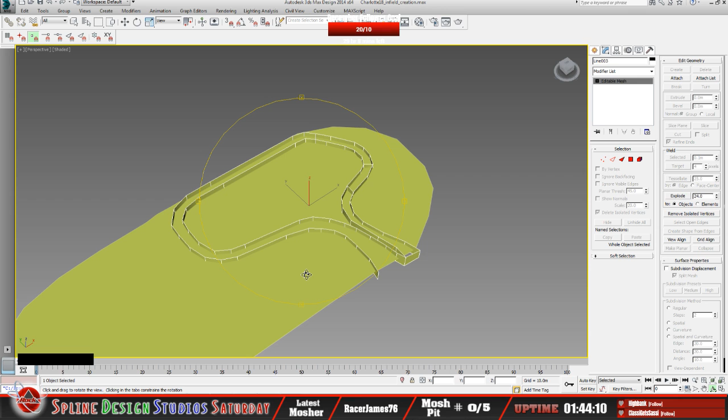Okay, now once again select the piece you want to cut. Starburst, Boolean, cut, refine, pick your operand B.

Yep, see it's still leaving that out for some reason, even by doing that. So it's still going to require me, I guess, to put a cross section in there, looks like. Which is fine, that's the way it wants to be.

Okay, so that was a good point to make though, I guess, as far as - yeah, definitely ruled that out. And you know, like I said, the way I initially went about this is to do it independently. I did the outside cutter and then the inside, copied that piece for the cutter, put that to the side, and cut them independently. I didn't try to cut it all at once.

So this is why I saved it for the stream, because I want to be able to try it in that fashion. And the fact that it is possible, it's just that you've got to fine tune, as far as putting additional cross sections in here as well.

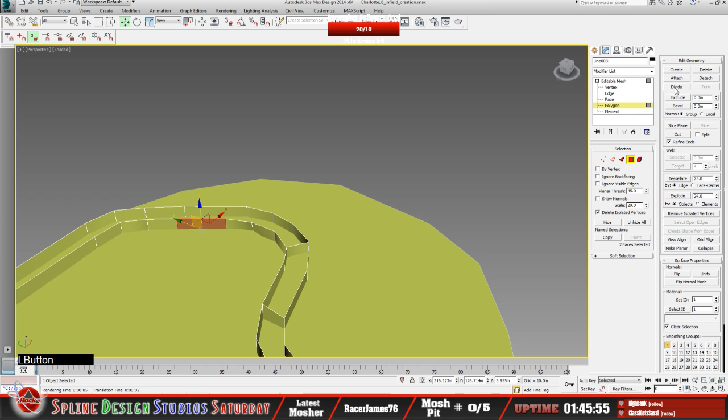All right, so what I need to do is go back into poly. Let's grab this one here, detach it as an object. Did it? Nope, the heck? Detach object - there we go.

Okay, and then just select that, go to edge. Select the edge, and kind of rotate around that there so we can do a shift drag, out like so. Alright, now we just got to see where we're kind of there. So I want to get those right into that.

Does this indicate there is a connection issue in the inner part of the...? It could be, I'm not sure.

The fact that it's cutting through here, and this is all open, I got this closed up. Yeah, it kind of confuses me a little bit because the fact that it's cutting all through here, I don't have this closed in like I do this, and it's forcing me, I guess, to have to do all this. I'm not 100% sure, but it's not completely impossible to create one big cutter.

I guess that's what we're in the process of doing right now. So, okay, now...

Go on to these vertex, I'm going to turn on the vert snap. There. As well as down here, like that. So those are snapped, turn that off.

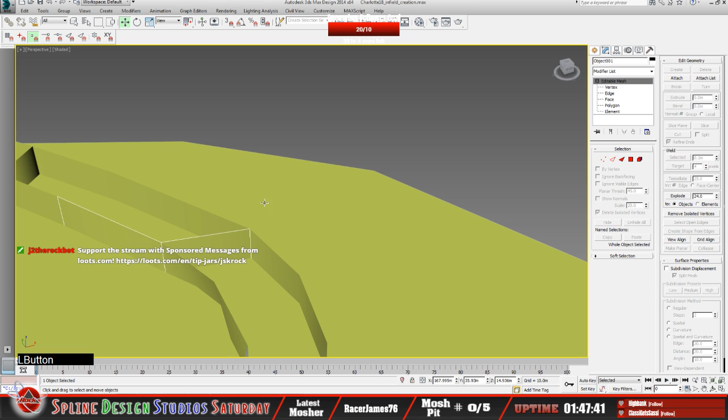Now I need to collapse those all again. Collapse, go to my hammer, collapse selected, make it all one piece. Okay.

Go back into... now this is definitely should work. There should be no... I'll be surprised if it don't.

Alright, so if we go into this, go to Starburst, Boolean, cut refine, pick your operand B, just the cutter. Yep, and it's still friggin' - look at this crap.

See, from this point, what I could probably do, that's probably what I'll end up doing. I can kind of fill that in. This is pretty... yeah, I think what I can do from here is just do a cut.

If I change this to an editable poly, yeah, I can fill that in. And I could have done that even before doing all those cross sections of the cutter to kind of fill this in here. But because it's only this here and I only got to connect that to that, what I can do at this point...

Is convert this to an editable poly. Okay. And just apply, and I'll put it on edge snaps, edge and vert snaps, like so. And then go to polygon.

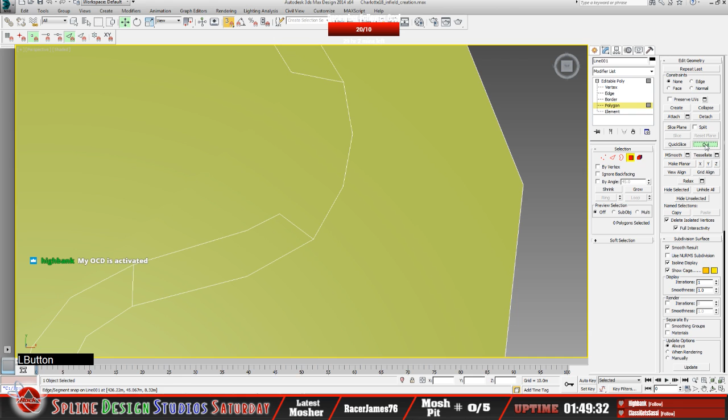So yeah, change it to an editable poly. I'm gonna put my vert and edge snaps on. Okay, and then I can do a cut right over here. And if I zoom in on this enough, I can just cut this like so.

Yep, just get that pin in there like that. See, and I can cut it that way as well. Now, I might have to cut it again just to kind of refine this a little bit more. In fact, I'll go ahead and do that right now. I'm going to have to cut this here.

And that's where snaps come in very handy for this type of thing. So when it turns yellow like that, I can left click, drag it over here, and just right click to get out of it.

So now I can more precisely define it. So if I go into vertex, holy crap, look at all these verts in here. What the heck? Yeah, see, so this is sometimes what will happen too, because I've put all those cross sections in. A lot of these verts I don't need, so I might find it necessary to delete some of these verts. It created a lot more verts than I really needed.

No, the other cut that I did there was just basically a poly cut, if that's where you got lost. All I did was just do a cut into the poly. I guess you could say it's somewhat of a different kind of cutter. You're not using another poly to cut into a poly, you're just cutting directly into the poly, like using a saw, like a jigsaw or Skilsaw.

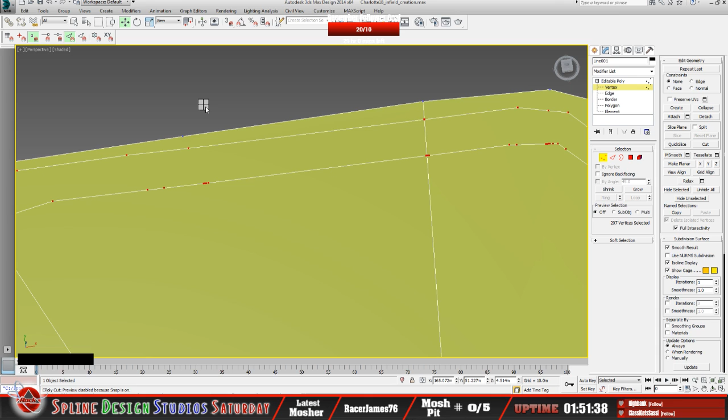What I'm going to do, let's bring back the track mesh, like so. Yeah, we got a lot of verts we don't need, that's for sure. And this is common for applying a Boolean cut - you'll end up with a lot of vertices that you don't need.

So like I said, what you necessarily have to do at this point - let's go completely top down - is to either spread them out or just delete them as necessary. So now I can just kind of refine. Okay, yep, so I can spread some of these out.

And again, like I was saying before, because a lot of this part of the track is still kind of buried, do one thing at a time as far as adjusting your verts at this point. You want to get it to conform more to the area of the track that you're trying to define in the infield object.

Okay, I was just catching my chat there. I want to make sure I didn't miss anything there.

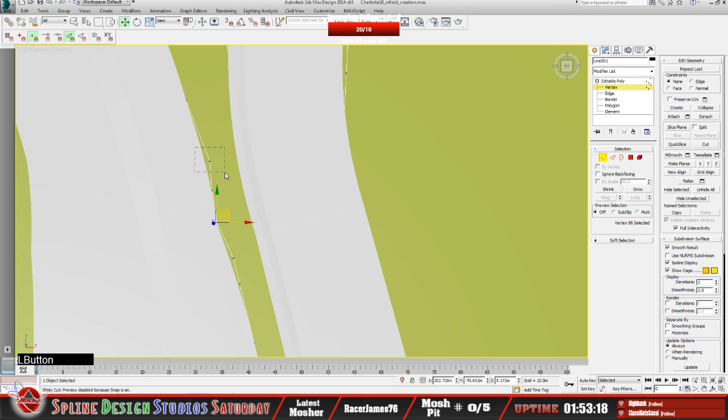So yeah, like I said, what you'll end up having to do here - and this can be somewhat of a tedious process - is to clean out all these additional verts that tend to get on top of each other. Some of them you may find it necessary to just delete. Some of them you can keep and just kind of spread out. You can use those to more precisely define your area that you're trying to define on your infield object.

What it comes down to, as far as whether or not you need to remove these verts, what you would have to do at this point is look to see how many polys and verts you have in the object. If it ends up being over the maximum allowed, and I speak primarily for NR2003, then you would have to chunk some out.

So there's no need to keep all these in most cases after you Boolean cut. Let me check this really quick. If I check the number of polys in this object, it's only showing 23, so that's not too shabby. Let's see how many vertices there are. We have 230, so that's actually not terrible.

You could keep a majority of these, just spread them out a bit to refine the area. Like I said, I'm not going to go through all that, it would take too much time, but you get the idea as far as what you would have to do.

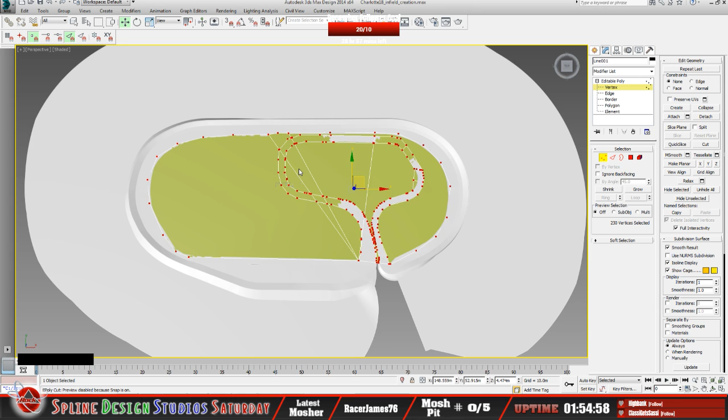Being on your total top-down view at this point, once it's cut, just adjust these accordingly, spread these out. You don't want to keep these that close, because your mapping is going to get really funky. When you bring it into your unwrap modifier for texturing, it's going to be pretty funky, so you want to spread these out to refine your shape a little better.

So just kind of like this, and you can go by either one. Either you create a ground plane of the actual track itself as far as the background image, or just use this like I've got here, and just go through it all. Like I said, I'm not going to go through all that because that'll take a while, but you get the idea of how to refine that area.

From this point, having this area all cut out, once you get all these points spaced out properly, you'll be able to adjust them to get in much the same way you do on the extreme edge. Let me show this here. If you had these spread out and all moved properly, you can bring this up or down. Whoops.

Okay, are we that far off? Holy crap, alright, hold on, let me grab another point here just to kind of... yeah, there you go. See how much you need to adjust it. Once you get these all spaced out properly, you can adjust that point so that it's just below the surface, so you can see how much that needs to be adjusted.

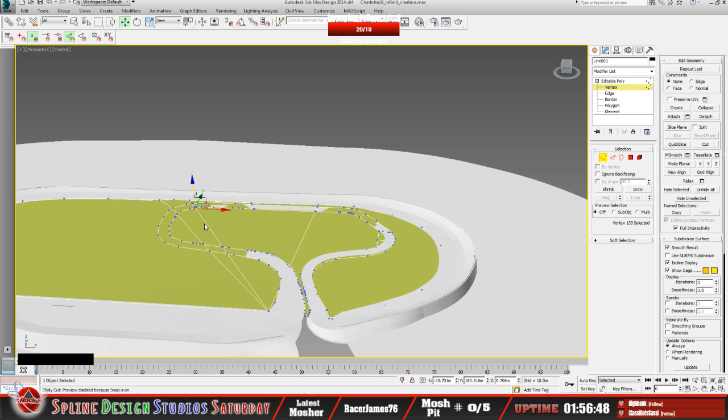If that makes sense, hopefully. That would take quite a bit of time to get done, and that's why I wanted to show just how complex that process is to get it that way. It's necessary to do it, because in order to take all this elevation that I showed previously before I cut it — it goes up and down and all that stuff, it's not completely flat — you have to conform the 3D model of the infield appropriately.

That is about as quick as I can show creating an infield object of this complexity. Most of your other tracks that you would deal with, you wouldn't have to deal with all this cutting. For example, you could just make your spline, as I showed from the beginning, to follow the contour, the perimeter of the infield like that.

Then once you've got it closed in, just create it as an editable poly, and adjust it up and down so that it mates up with the actual track spline geometry. And then that's pretty much it.

This is a little bit more complex because you have all this going on in the infield with all the height data and what have you, so that's why it's a little bit more difficult. I wanted to make sure I showed that, so that should clear up, hopefully, the explanation of a lot of that process. That's about all I really wanted to show with that.

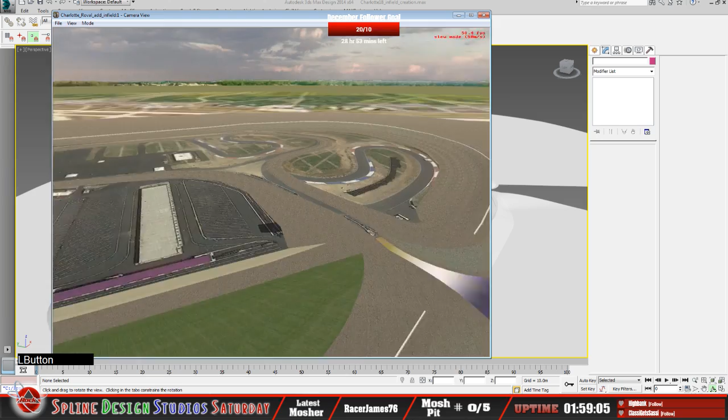Let me zoom in on this. On the edges here, you can see the gap that exists. So I need to bring all the points on the very edge of the infield to mate up with the track spline geometry. That's one of the things I'll have to adjust on this model that's already been done.

So that's what I started doing at the start of the stream, and that's what I'm going to continue here. I don't remember if I started on this end or the other end, I think it was this end. Let me check that out. So let's select that. Oh, I know what I didn't do, because I already had, I wanted to show the unwrap.

So I think I'm pretty much good on that, and I've already gone over it, but I can briefly go over it one more time. With the unwrap on there, it has all the wireframe, and I think I did it as a normal map as opposed to a flattened map. There's a difference between the two, which we've shown before, and I can show that here.

In fact, let me go ahead and save this scene really quick, just so I have this to go back on. So I'm going to save as. Go ahead and save this. And then I'll demonstrate the differences between normal mapping and flattened mapping, and the results you get.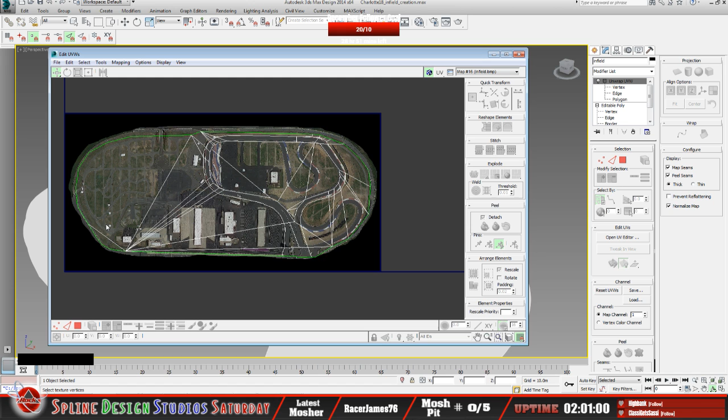So if you've got your Unwrap UVW modifier in there, this has already been conformed and scaled properly based on it, and you can really get a sense of how you can line this up now, because you have all these lines that are cut. You can actually get those where they're supposed to go. Really, to be honest, I did not need to adjust any of this.

The only thing I did adjust was in here. Let me go into poly mode. So this is all the poly selected. I just went into this one and lined it up this way, following these contours of all the lines. That's all I had to adjust, because of how close I got the cut to get that area in the infield. That's all I had to adjust, the uniform scale on the corners. I did not have to touch anything on the interior.

So depending on how precise you get with your cut, as far as like the way I've got it here, it takes a little bit of the work out of having to go in and adjust them all independently. The fact that I've got it that close to where all I had to adjust was just these outer edges to get it all to line up, that's a huge time saver.

What I have to go by to get it lined up here is, like I said, as far as all these lines, because I've refined it so well, I can follow that directly. Yeah, in fact I can. So I just follow that directly, just like that. That's how I was able to get that lined up.

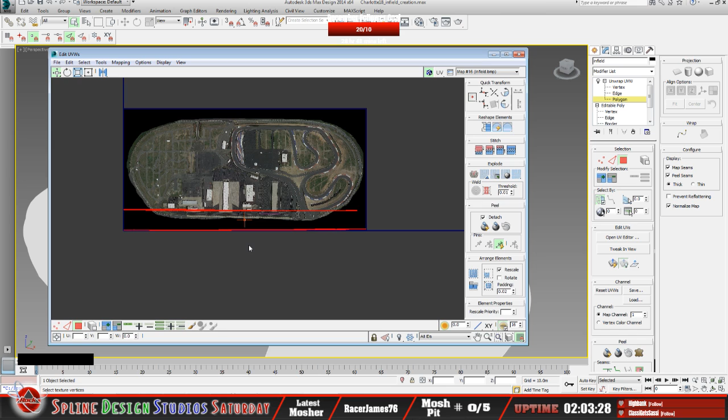You get these options here for mapping. So a normal map, and usually I don't change any of this, I initially leave it all at default. That's what your normal map will do. Control Z, you can bring that back. If you do a flattened map, you get this result, which is closer to what you want.

So that kind of gives some clarification of what mapping I do. This is what you want to do: find the best result as far as where it makes it a 1-to-1. I think the only thing this orientation creates is it needs to be flipped, which isn't hard.

You can just flip it this way as well as this way. Yeah, see, you can see that outline. And then from here, like I said, all I had to do is just line up on the corners like so, zooming in to get it lined up. So I didn't even need to do grid snap or anything like that.

My cuts that I made in the Boolean process lined up very nicely. So all I had to do is just line those lines up with the actual track surface in there. You can zoom in all you need to get that precise. So that's pretty much all that's to that.

Keep in mind, this is a very complex infield object. The fact that it has all this going on in the infield - the majority of your infield objects are going to be relatively flat, you're not going to have a lot of complexity. You might have some height data to where you might need to bring it up or down, depending on platforms or whatever exists. This is a little bit more complex.

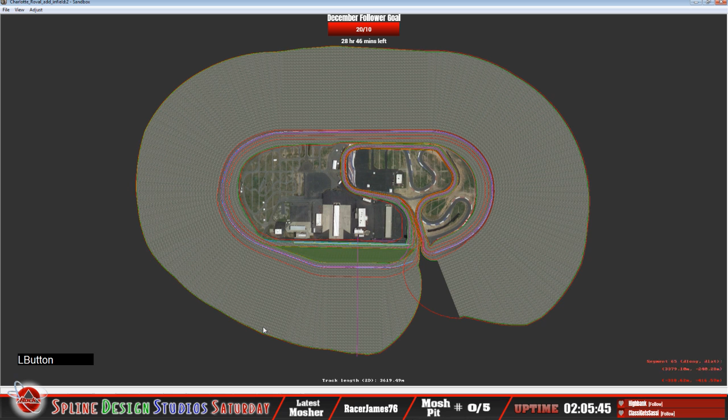You can see how much - and this is a pretty detailed SAT image, to be honest - but the fact that some of this I can keep, some of this I'll have to probably create an object for, to make it a little bit crisper, more quality.

So like this area, I'm not going to leave it like that. I'll probably recreate this in a paint program and create either a TSD or an object to make that a little bit more vivid, areas like that.

I'm not too concerned with these areas that aren't raced on, like these areas - I'll probably just leave that, what's on the SAT image. I think that turned out pretty decent.

So eventually what I will end up doing is adding all the curbing to the areas. The fact that that's all we got here is just the asphalt so far. But yeah, eventually we will end up applying our curbing sections in the different areas to include what's on... whoops, why do I keep doing that?

Yeah, to include what exists on the bus stop on the backstretch here, going into turn 3 of the main oval, and there's another area here, a little chicane, whatever, on the front stretch here, which doesn't show through.

But let me go ahead and turn - let's turn that off like that. Oh, you know what, I forgot what I... yeah, let me put the background image back in. Forgot I took that out, just to kind of show the difference between. Okay, so I bring the background image back in.

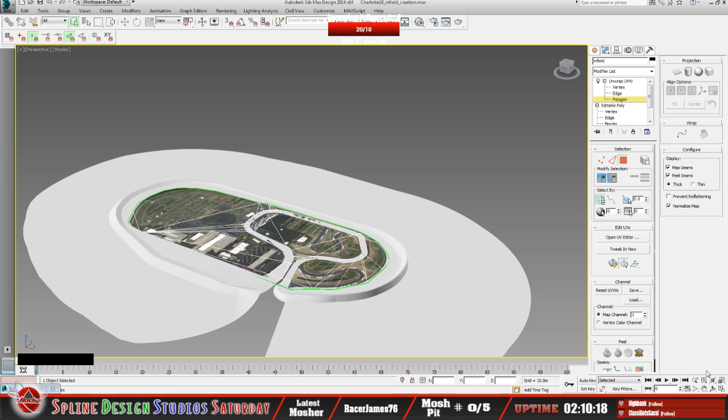Even up at this point, it's been working very, very well. We've been able to go into testing mode and do a lap or two around it, and it turned out pretty well so far.

What I'm going to do is collapse this object so that it removes and maintains that mapping of the texture. I can always reapply it. That's the thing too - if I find it necessary to tweak the texture onto the model, I can still apply that, unwrap it, and all the mapping will still be there, and I can make the appropriate adjustments as I need to.

So let's go ahead and go to our hammer and collapse selected, and all that'll do is create that as an editable mesh. I'm going to go ahead and just convert that back to an editable poly. I've gotten into the habit of doing that, because most of the things you want to do, like cutting, you're almost always going to do in editable poly anyway. It's very limited what you can do in editable mesh as opposed to editable poly, to include boolean and all that stuff.

Okay, I think where I'll adjust first is on this end. So enter infield object, we'll go to vertices. We can zoom in on that after we drag select, and just go ahead and adjust.

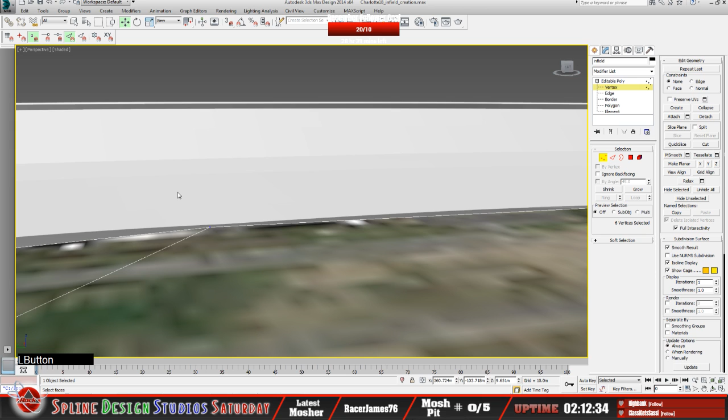Good. Now, I may find it necessary to add more cuts in here to fill in, because there's still a little bit of a gap here. But again, I'll do one thing at a time, to get it adjusted all the way around, and I'll go back around to see if I need to make any further adjustments. It's just a good discipline to get yourself into here.

Don't try and cut and, you know, just be disciplined in doing one thing at a time, because you can go too far and be like, oh crap, I shouldn't have done that. I speak from experience when I say that.

Okay, yep, so it's bleeding through there. I'll probably have to put an additional point in here because this is kind of all hanging. There's no... oh, there is a vertex here. Okay, cool, alright, so bring that up. Yep, there's one here. Good deal.

Alright, so you get the idea as far as how this works. You see it bleeding through the actual track mesh. I could probably move this a little bit more.

I want to be careful moving it laterally because you can get that really screwed up if you do that. Try and only focus mostly on adjusting the Z on it, in this case just the up and down. Yep, so it's tucked under there enough, so where it's not... yeah, cool.

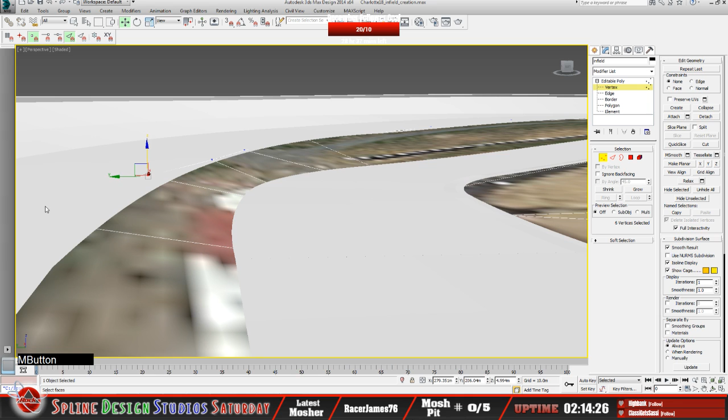So I just want to fix all of this, and then we'll be able to make our new 3DO, put that in the track itself, and we'll get to test it out. Okay, so I'm just going to go through this. I think this is pretty straight through here. I got to see if there's any more points. Yep, there's one here.

Okay. Oop, that's on the other part there. Okay, yeah, I think this was pretty straight through here. Yep, so there should be... wow, I realized I had that far away. Okay, yep, see that's controlling all that through here.

Cool, all right. Yeah, this should be pretty good down here because some of the areas might need to be... let's see, there's one here. Go. One here. This should be pretty good in here, yeah. Okay.

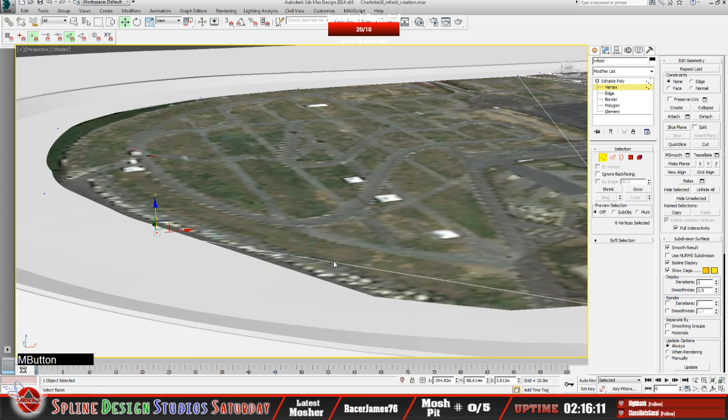You know, and like I said, you can necessarily try to do vertex and edge snap when doing this process, but in a lot of cases it's not really going to give you, so I just tend to go one by one here. But it also lets me check all these different points to make sure.

Yeah. Oops. Hate when it does that. It's using up memory there. That's what's kind of blinks out there a little bit sometimes for me. This tool does tend to use a lot of memory.

Yep, so then we got that there, and that's controlling all this here. Okay. All right, that should be pretty good there. So let's see how that looks.

Yeah, let's just pan this around here. That's actually not... oh, got a big gap here. Holy smokes. Ooh, okay, so I got a point here.

Huh, alright, hold on here. Definitely got a big gap right there. Okay, I see it, missed one. There we go. Okay, and there's one right there.

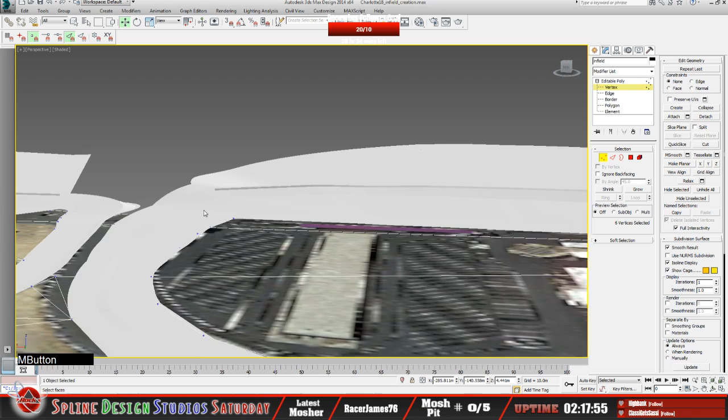Okay, so let's try this here. That's pretty good right there.

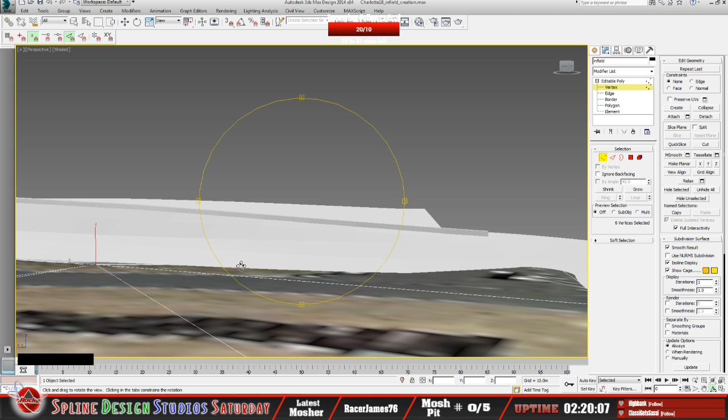Okay, so it looks like we need to have it right about there. So is that too much of a gap there? Let's see, yeah, I might need to cut across here so that it's not controlling this as much. Okay, see what's happening here is it's moving out of this area as well when I move this, because it's all extending out this way. So I might have to cut this across so that stays put and only moves this part.

Yep, so let me... holy smokes, let's go to top down view, do a zoom on that. Okay, make sure I'm top down. Yep, so what I need to do is cut through here so that this stays put over here. This doesn't adjust when I adjust this one right here. Have a little bit more control on that. You can already see this here too. It needs to come in.

There we go. Alright, so yep, this should already be as an editable poly, so that's what we want.

So what I'm going to do at this point is go into polygon, go to cut, and turn on my edge and vertex snaps. Really only need edge, but I'll put them both on. I want to cut across this like so, and that will automatically create two new vertices. Let's turn the snaps off.

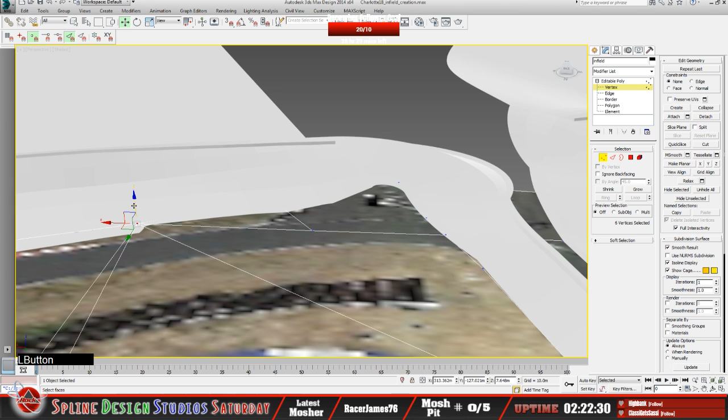Yep, that's actually a little bit better. Not too shabby. Alright, so just trying to find a nice midpoint there. That's probably pretty good there, so let's see. That's actually pretty good. I'm happy with that. Kind of mates up with that really nicely.

And I can render it to get a better perspective of it too. Let's go ahead and render it. Yep, that looks pretty good. I don't see any gap in between the actual track mesh and the... I'm satisfied with that for now.

Okay, so now we've gone all the way around the track to fix all them problems. If I hadn't made that point clear enough, all the areas where I'm seeing the gaps in Sandbox here, as far as the camera view, is the same gaps I would see in Max, because this track mesh in Max is the same as what I'm looking at here in Sandbox. So all these gaps that exist here would necessarily be present in Max, and all of these should go away. So when we test it in the game, these gaps should be gone. That's what we're gonna find out when we test it in the game itself.

So now we're to the point, I'm gonna go ahead and close this for now. I'm gonna do a no. That was just to show that a little bit. Now...

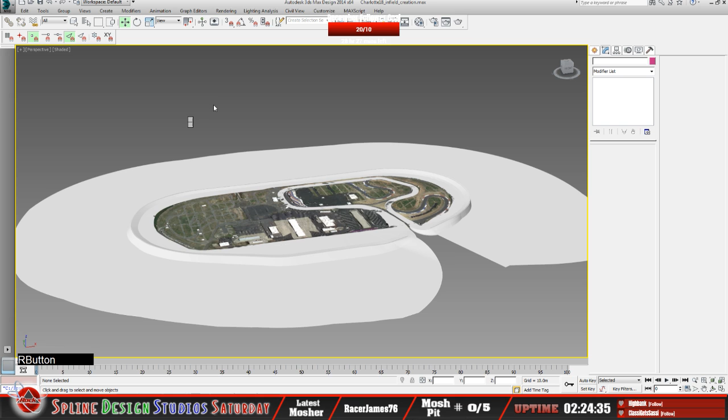So now that I've got all those points on the edge adjusted, I'm going to save this as a scene. Okay, then I only need to unhide anything that's in the scene that I don't want, so I need to get rid of... whoops. I need to keep just the infield that I've got adjusted with the texture, so delete. This is the only thing I want in here.

So when I create my 3DS, in fact, let's go to their folder. That has that all in there. Yep, so I go here, I should have a Charlotte infield creation. Where's my 3DS? Yeah, my infield 3DS right here.

So probably what I'll name it as is infield 2, so I have this as a backup. Let's export this out from Max, because in order to make our pass file, I got to open it up in Max 5.

Anything pre-2008 is what you want to necessarily use to create your pass export. So like Max 7, Max 6, Max 5 — Max 4 I don't believe it does work. Alright, so we've got this named properly, so we need to export this with the texture on it.

Go to D, mesh, navigate to our folder where that is, do it as a 3ds, and I'm just going to add a 2 to this one here. Okay, so that's all good. Now I'll just confirm that that's saved. Right here, so that's good.

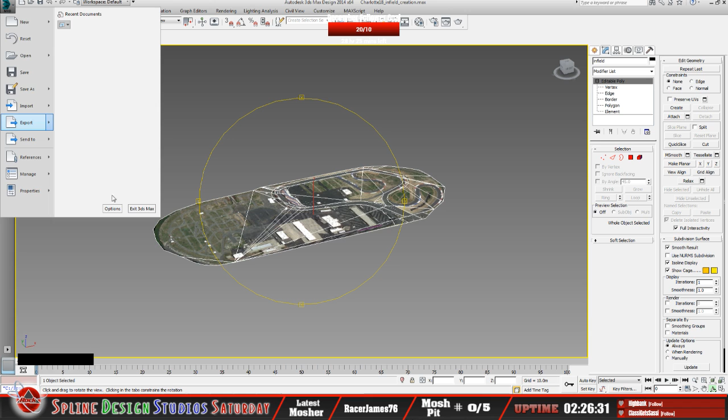So now I can close Max 14. Done with that. So we'll do reset, don't save, and just close it.

Now we need to open up Max 5 in this case. So let's get to Max 5. Here, let me put that down here. There we go. So Max 5 in my case. So I'm going to load this up.

Yeah, we're making pretty good time on this too. I'm happy with it. I am going to have to take some meds when I get done with this here, so I'm starting to get really, really woozy and nauseated. So...

I'll get this thing made. I get these two, that's normal. Once I get this made and we get it tested in the game itself, I'm going to definitely have to call it quits, because I'm starting to feel like doo-doo again. So, unfortunately.

Okay. So now we're in Max 5. Now all we need to do is import our 3DS that we created in 14. Whoops, I need the right folder — 3D mesh items, Charlotte, 18, and infield 2.